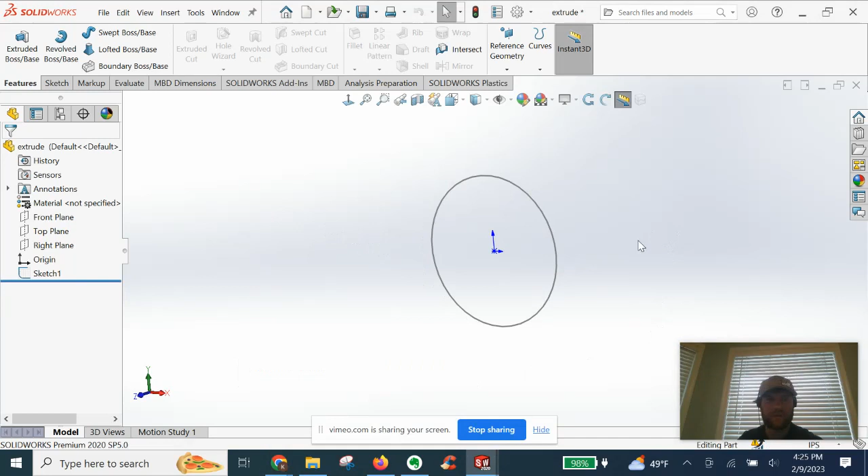The nature of the Extrude feature is that you need a closed sketch first in order to complete an extrusion. Let's go up here, we're out of the sketch. We're going to go to the Features tab, and up to this first feature here, Extruded Boss Base.

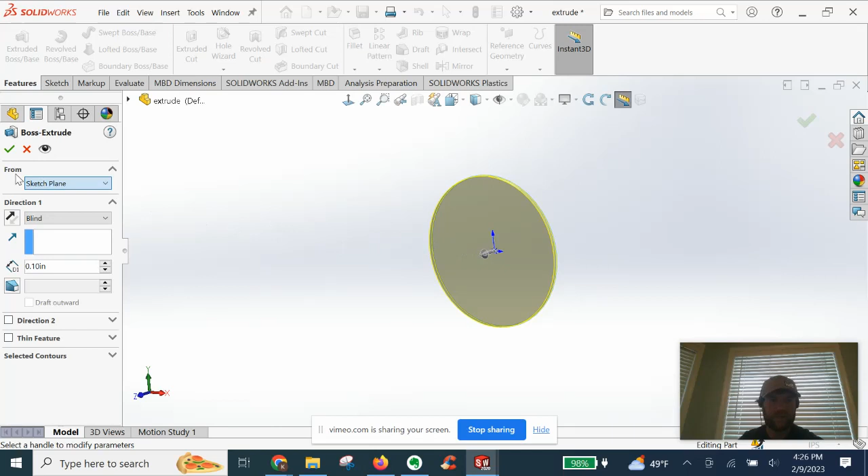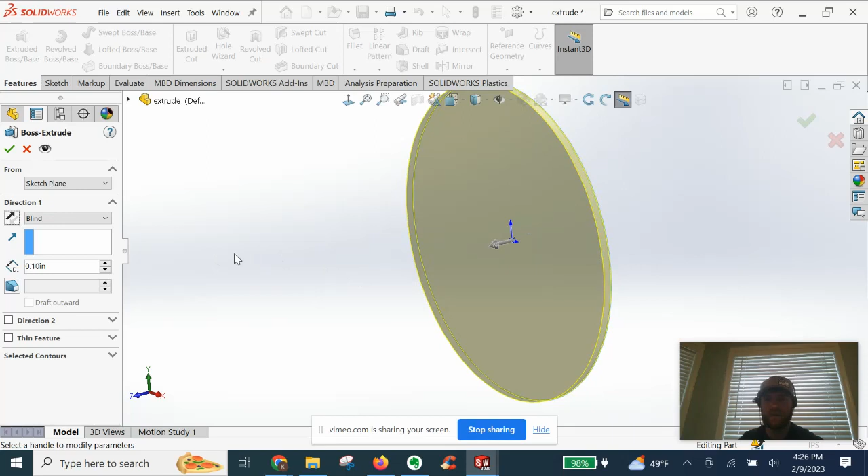We're presented with this left strip here. We're going to select the sketch plane, and go in a blind direction. You can see it's giving us a preview already, and an arrow in the direction we are extruding. We can flip that direction with this button here to change the direction.

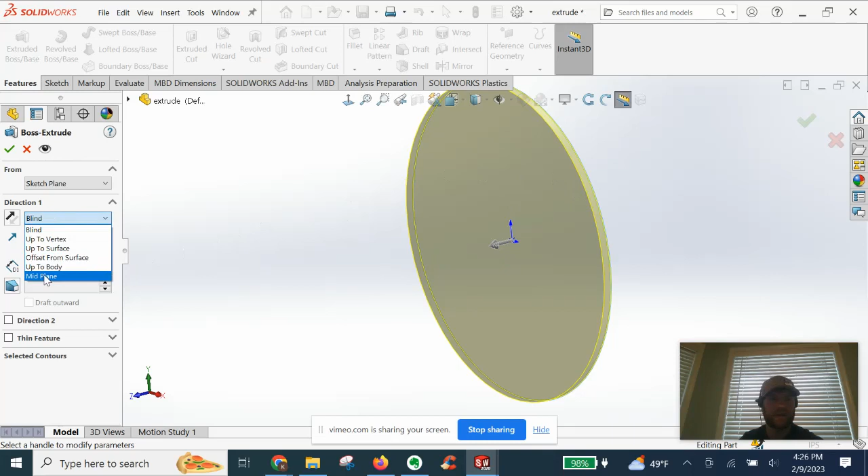We have several options other than blind: up to vertex, up to surface, which you'll see in future videos why these are so important, offset from surface, and mid plane. If we wanted to cut the plane down the center and go in both directions, you can see our sketch is this blue line. We can select that, but let's leave it at the first one for now.

You can see our sketch is on this back face here, and we're extruding up from that plane. And our distance, we can increase that. You can see our preview is changing as we increase.

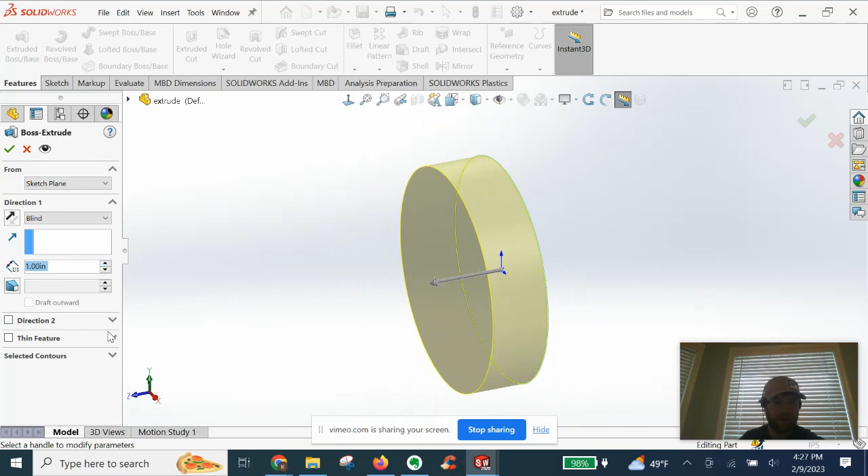Selected contours - the one we have selected now is sketch 1, which is already selected. If we wanted to reselect, we could clear selections, but let's see how that's populated when we select the circle.

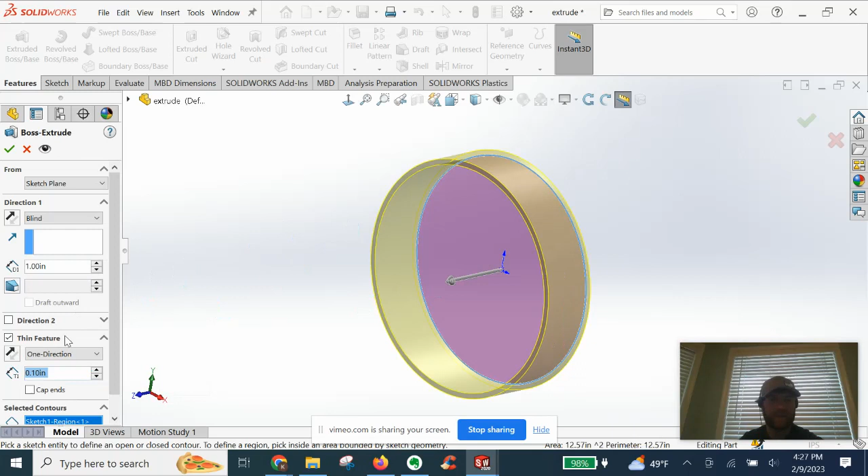All these other settings we'll get into in future videos. Draft, if you turn this on, you can actually set how tapered it is. That's another advanced feature we will not get into for now. For CSWA SolidWorks Beginner, we're going to go ahead and select OK.

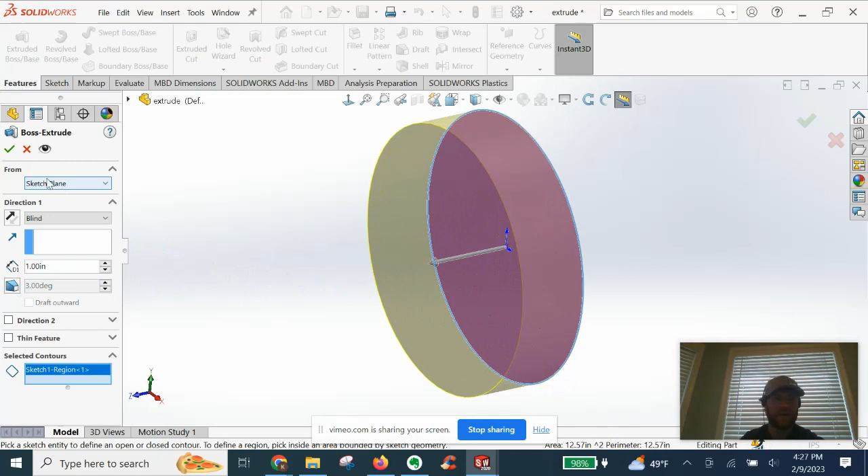Now you can see in our design tree, we have our extrusion boss with sketch 1 consumed underneath it. We can always turn the sketch on if we want, or we can suppress it. Either way, that is the simple tutorial for an example on SolidWorks Extrude.